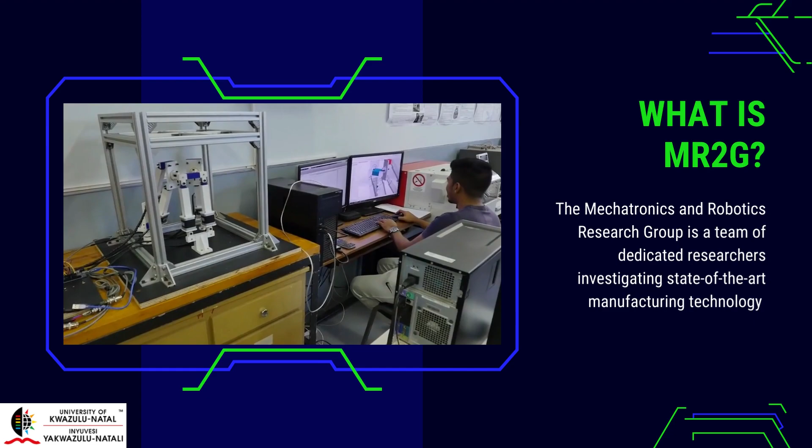A further thrust of our research group is the innovation and development of low-cost robotics for the South African market and also the African market at large. The National Research Foundation is presently funding much of our research into the development of unique robotic architectures.

In 1995, the Mechatronics and Robotics Research Group was formed, commonly known as MR2G. The purpose of the group was to provide solutions to local industry, also to provide human capacity development for master's and PhD students and undergrad projects as well.

The purpose as well was to make sure that we have research that is cutting edge, and that's why we strongly invite our undergrad students to become involved in projects at final year level and then move through the postgrad and PhD level. Exciting projects: mobile robots, kinematic robots which you see behind me, advanced manufacturing systems, mechatronics. These are the cutting edge projects that are making up the fourth industrial revolution as we speak.

The group has evolved over the years and has produced over 100 master's students, over 50 PhD students, conference papers and journal papers. It is really amazing how members of the group are spread throughout the world, and it just shows how in demand our graduates are.

So I encourage all students, prospecting students, to have a look at our research group, have a look at our projects, and come and join us in an exciting venture of mechatronics, robotics, and advanced manufacturing systems.

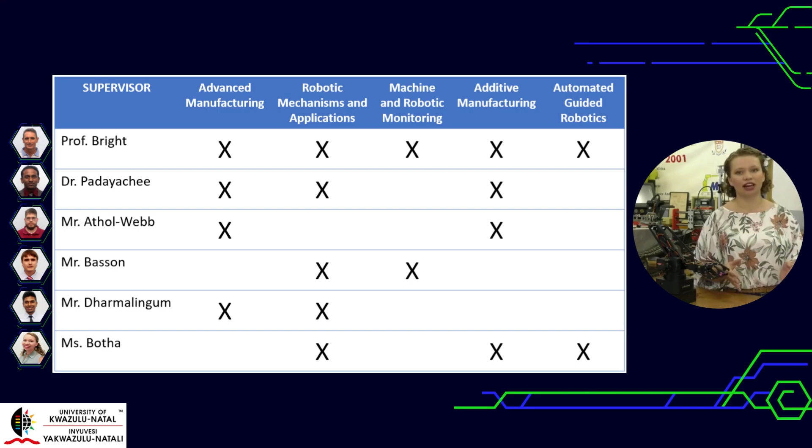So over and above the specialization and whether this is within your area of interest, another thing to consider with your supervisor is if they have the same outlook in terms of what their expectations of the masters are for you. And a great way to determine this is to first schedule a series of meetings prior to you starting the application process. And what this allows you to do is you can meet up with the supervisor, you can discuss your expectations, what your plans are career-wise after the masters, and see if that aligns with one, their research field, and two, their expectations and scope of the project.

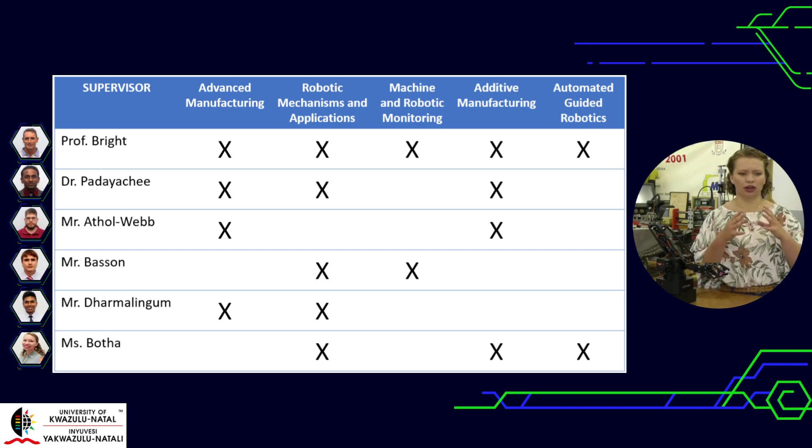And over and above this helping you understand exactly what's expected of you, it also builds a rapport between yourself and your prospective supervisor. So starting off with the design in front of me, I have a serial robot arm that was used in a paraplegic archery device.

We have a plastic injection molding machine, a security robot, a CNC router, a 3D Delta printer, as well as another type of serial robot arm. And these are just a few examples along with the ones that are shown on the slide, which is a refreshable Braille reading device which translates printed text into Braille in real time.

More on the manufacturing side of things, we have a human-robot collaboration system which allows the robot, through a series of sensors, to generate its own position relative to the human working around it for safety reasons. We have a sensory glove which allows a human to control a serial robot from a distance away. So for example, a surgeon who can be performing a surgery from across the country using the glove and the arm.

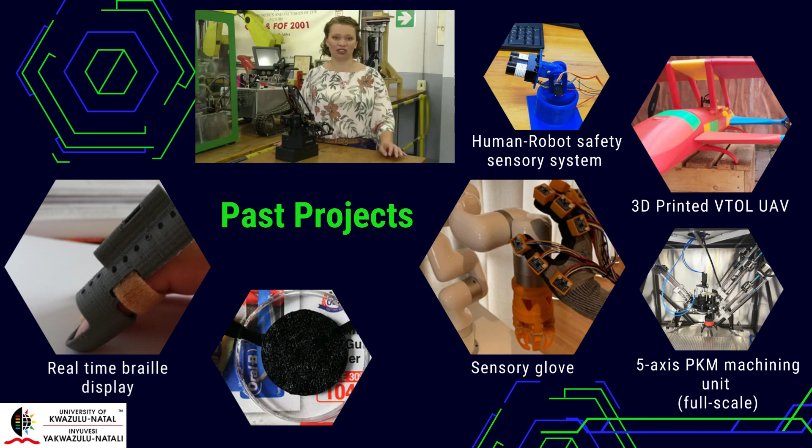And then from a more mobile robot perspective, we have drone technology and drone artificial intelligence, where on the slide you'll see a 3D printed vertical takeoff and landing device. And these are only a few examples of the possible master's projects that we've completed in MR2G.

For those of you wishing to pursue a career in academia, working to develop the cutting-edge technologies of the future, a master's degree is the vital first step in developing your research skills. And for those of you going into industry, a master's degree is not just a method of separating yourself from the pack in a competitive job environment, it can also be an expectation in a number of career fields.

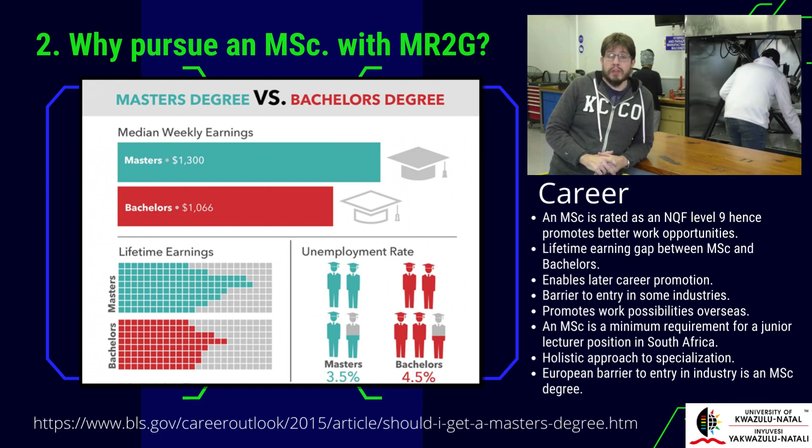When developing your career in academia or industry, a master's degree is a key way to develop your own skills in the areas of research and problem solving in such fields as robotics and manufacturing, for example, developing programming, simulation and design, as well as your own personal skills such as problem solving, as well as other fields of personal growth.

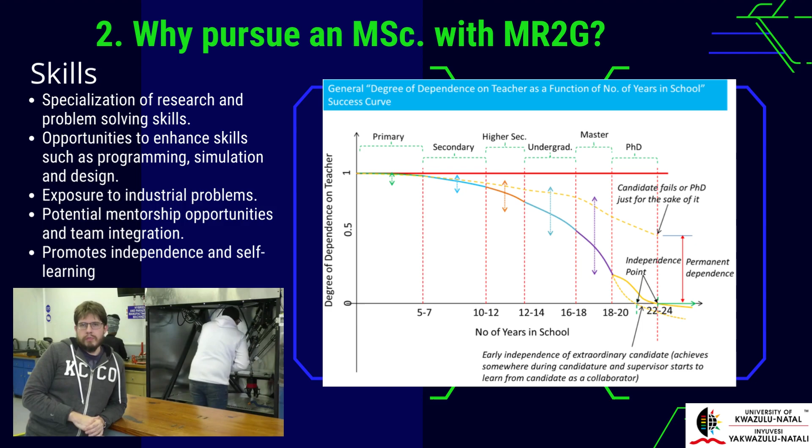By the time you register for a master's degree with the Mechatronics and Robotics Research Group, you are already a graduate engineer. Therefore, when students come into postgraduate studies, we expect that people who sign up with us would display the type of professionalism and work ethic that is expected from an individual with a bachelor's degree in mechanical engineering. In other words, the type of work ethic we expect you to display would be that displayed in the workplace as if you are undertaking your first year of work.

So what does this mean? This means coming to the office on time, being accountable to your supervisor, being conscientious about the way that you conduct your work. In a nutshell, we expect our students to display the highest level of professionalism, and you should treat your master's research project in the same way that you would treat your first job opportunity.

Our history has shown that students who do not approach this type of project with the correct work ethic often deregister from the degree and tend to waste a year of their lives. So when you come into the Mechatronics and Robotics Research Group, we expect you to handle the pursuit of this degree with the utmost dedication and seriousness.

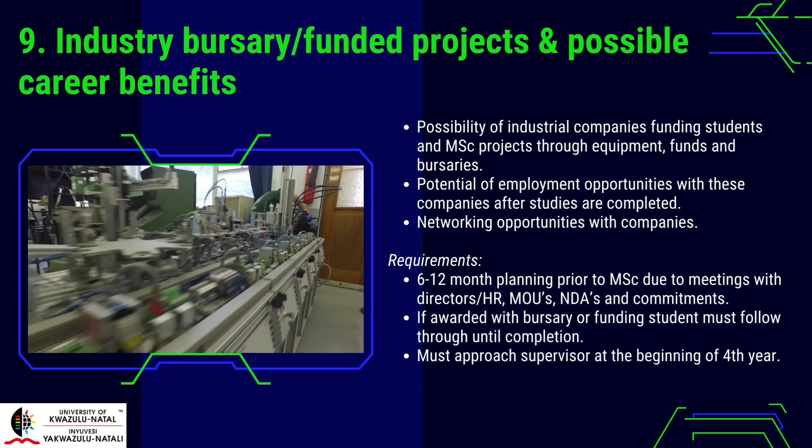Mechanical engineering at the University of KwaZulu-Natal. We design, we engineer, we power. Mechanical engineering combines sound knowledge of physical and engineering science with ingenuity to create mechanical devices and systems that are essential in almost every industry and every phase of technology.

The University of KwaZulu-Natal prides itself in being a research-led institution, and the Mechatronics and Robotics Research Group is a proud contributor to this effort. Over the years, we've produced exciting research in the field of robotics, mechatronics, and advanced manufacturing. Exciting projects have involved the design and development of CNC machines, robotic manipulators, and manufacturing simulations in our laboratory.

The quality of research that we produce is of utmost importance to us as we aim to make a contribution to the engineering and scientific community. We also want our research to be impactful to South African society. So where am I going with all of this?

We want our research to be publishable, and not only publishable but also scientifically peer-reviewed in high-quality journals and conferences. It is therefore our expectation that when master's or PhD graduates join our team, that you will share in our enthusiasm to make a powerful contribution to the field through the format of writing up your work and putting it out into the scientific domain, where it will be reviewed by our fellow academics and published in high-impact journals, therefore placing your work in a domain where others can look at it and glean from your work in order to advance their research efforts.